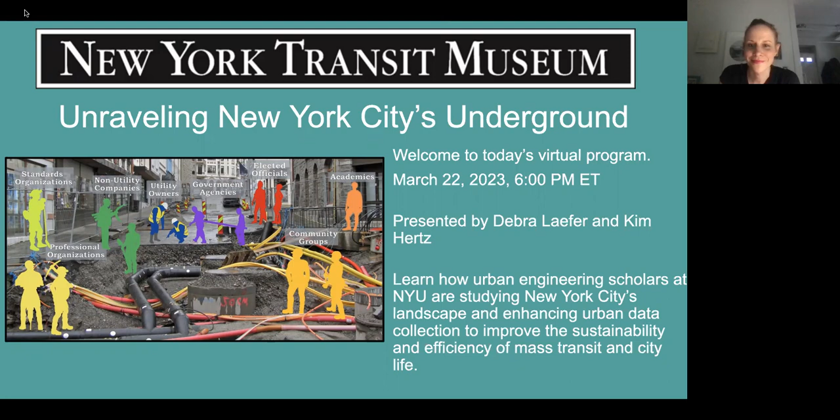Great, thank you so much. So in the spirit of a decommissioned facility, we are in a stairwell. So we thought that would be kind of a fun place to be. We lost our classroom tonight, so, but we're here and we're delighted to be here.

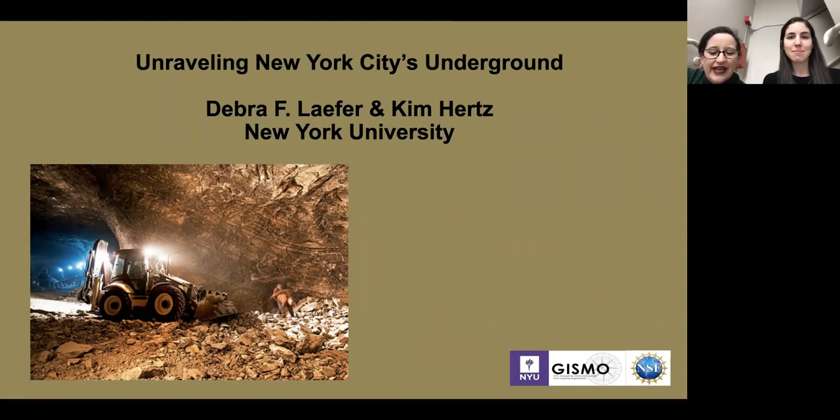It's so great to be able to talk to people who love the things we do, the things that are underground, the subway. I hope we can provide an expanded perspective for you today on what's going on down there. So the main topics we're going to chat about are infrastructure management limitations, abandoned infrastructure, and new tech.

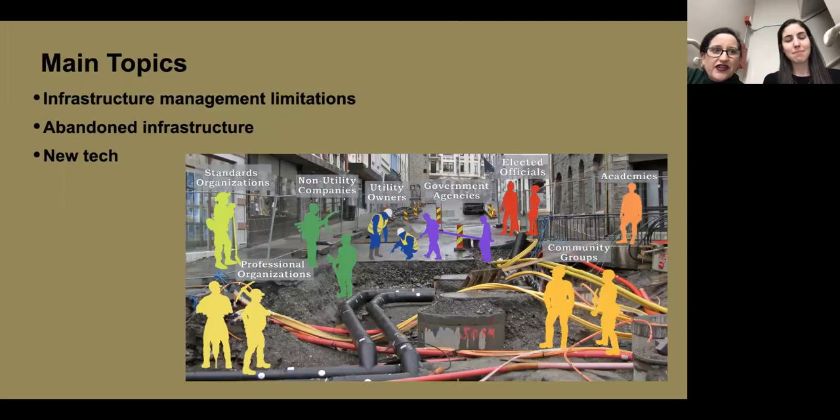Many of you have heard the term smart city. Certainly last year, it probably came across your ears. A decade ago, you would have heard it too, and even a decade before that, and a decade before that. This term was first brought in 1992. So are our cities today smarter than they were in 1992?

Certainly there are aspects of them. We know when the train's going to come. We know when the buses are going to come. Your councilman may be able to see on a live dashboard which streets in the neighborhood have been plowed for snow. But our cities still are not that smart. We still suffer from a lot of challenges.

So why is this? Why are our cities not smart? Today, the idea behind the smart city was to create what they call a digital twin, which was to put together technology of monitoring the city and being able to adapt accordingly. Today we've got robust, cheap, small wireless sensors, edge computing, which is where you're doing the computation at the sensor and you're not sending all the data over the web. Everybody knows about the cloud. And then these things called machine learning, deep learning, new ways to look at data, find patterns in it. And we have very dense remote sensing.

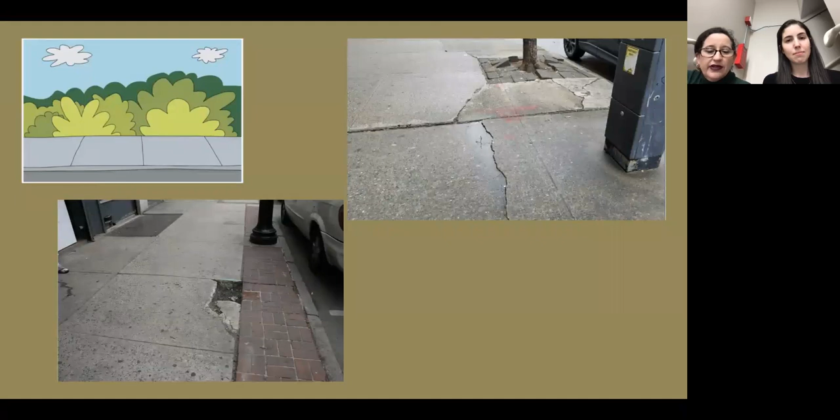When you talk about lacking domain expertise, if I were to ask you to draw a sidewalk, you might draw something like this, fairly straight, fairly same in dimension, quite flat. And the question then becomes, is this realistic? Well, if you go outside, you know it's not. Our sidewalks are much more complicated places. They're not beautiful like this picture. They're filled with all sorts of different materials, different conditions. Well, why would this be important?

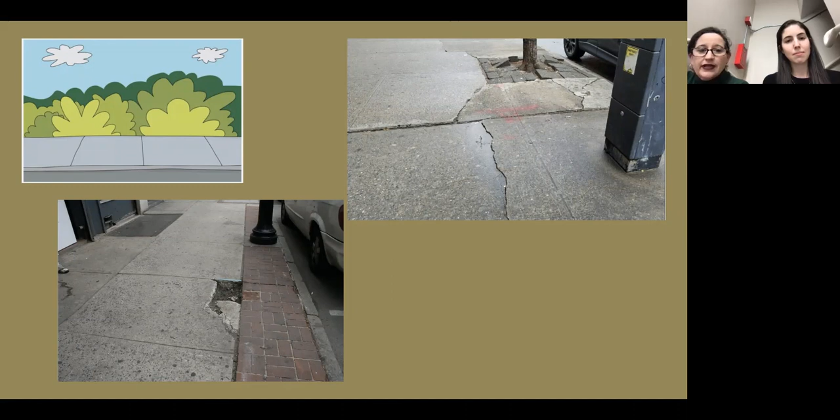If I put a little robot out to clean the street, and I told it that the sidewalk looked like the thing in the top left, we would probably have a very unhappy robot. The same thing applies to digital twins. If you create a system that is too perfect and too idealized, and doesn't really reflect the complexity of our urban places, this is what we get—things that are not fully functional.

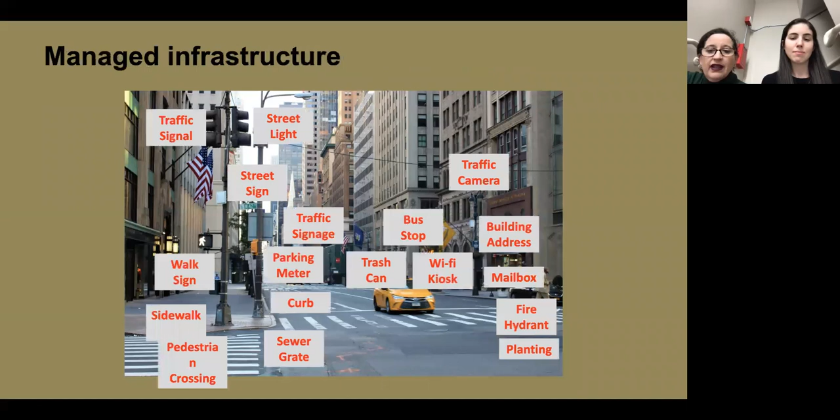Above ground, these problems are not so difficult. We have examples of lots of things that are monitored or could easily be monitored: traffic signage, parking meters, walk signs, all sorts of things. These provide a lot of what cities do in terms of public transportation, flood control, and trash.

Collection and fire response. When we get to the underground, it's not so complete—we really don't know what's there. Many people might think, like a body, that everything is in the right place, that there's a certain set of locations and organization to it.

We worked on this project with a wonderful artist named Emily Clark, and she came up with a concept to help people understand that cities are not like bodies. You may think the subway is a circulatory system, and therefore we know where all the pieces are, like knowing where the kidney and the liver are. But the underground is not so simple.

I'm going to share a short video that our artist Emily Clark made for us as part of the outreach for this project.

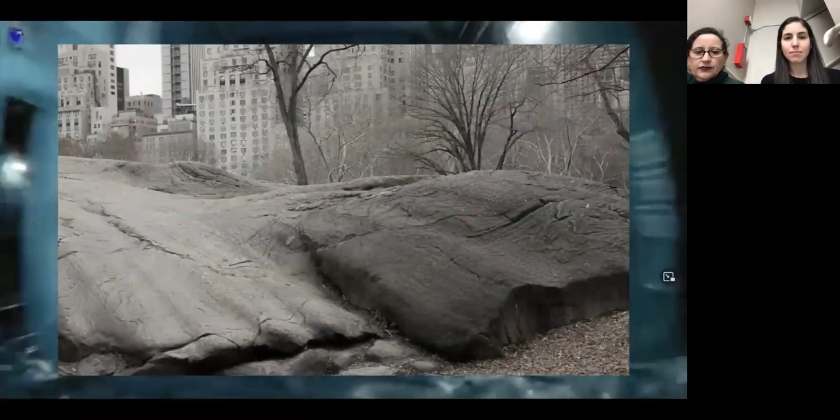A little over 20,000 years ago, the huge Laurentide ice sheet reached Brooklyn and began to form its geology. Then, as the southern end of the glacier began to melt a few thousand years later, it left boulders, rock mounds, small lakes, ponds, streams, and marshes. These still existing waterways can fill up during extreme weather and penetrate the subway's tunnels and stations.

On an average day, the subway pumps 13 million gallons of water into the city's sewage system. But when there's an excess of rain, the storm sewers back up. If climate change continues to fuel sea level rise and extreme weather, New York City's subway system will be increasingly vulnerable. During Hurricane Sandy, 46 miles of track were underwater.

Begun in 1904, New York's subway has grown with the city's population and now includes 22 lines, 472 stations, and 665 miles of tracks for trains that, before COVID, carried about 5 million passengers a day. This subway station goes back to 1915.

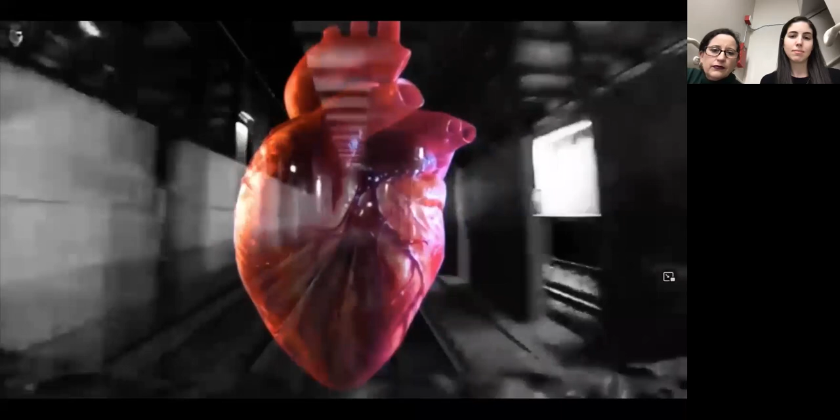Imagine New York City as a massive human body. The subways would be like our circulatory system, its arteries and veins allowing its blood, our population, to move throughout. Like the body, the subway depends upon many parts—trains, tunnels, and bridges—all embedded in the urban infrastructure of drainage, sewage, and electrical power sources.

Beyond all this, there is the natural world of rain and snow, of heat waves and cold fronts, which also impact the system. We may think of the subway as independent, but we can never extract it from the streets above it, the building foundations next to it, the utility manholes and pipes that run through it, and the sewage and drinking water systems that interpenetrate it.

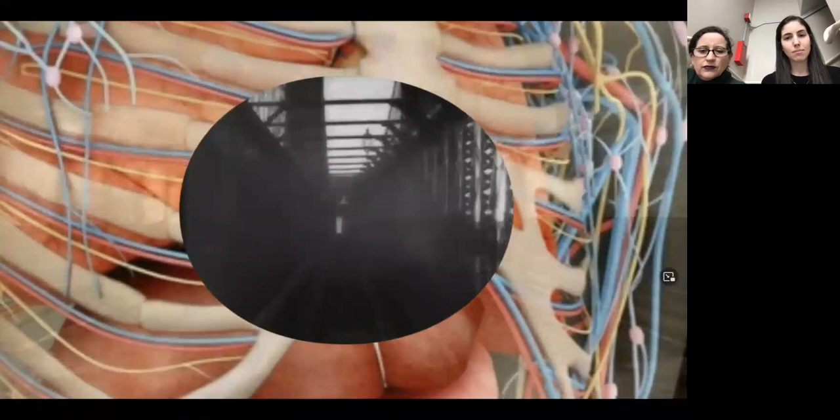Possible train routes were first determined by man-made underground infrastructure, but they were also planned in relation to geology, springs, and subterranean waterways. The subway's tunnels cannot help but overlap with the pathways of underground water, especially during storms. If the city is an organism in which the subway lives, the complexity of this organism itself already presents challenges. But the larger problem now is that this organism must also remain in harmony with the increasingly unpredictable environment around it.

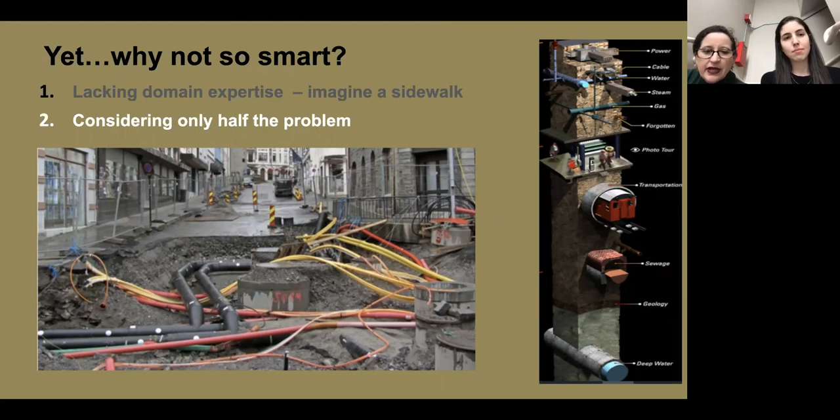I think it really gives us a wonderful quick snapshot of our city and the things that lie beneath it. When we do an excavation, unfortunately what we see is not a nice segregated set of services like you might see on the right, but you get this spaghetti problem, and everything kind of gets buried into these common trenches.

This becomes problematic particularly when we overlay all of this with the forgotten functions of the city. In many parts of New York, when you walk down the street, there are things happening beneath you that you might not be aware of: hollow sidewalks, basement access routes, coal vaults, things that maybe have outlived their service life but are still there. The sad truth is, once something goes in the ground, we rarely take it out.

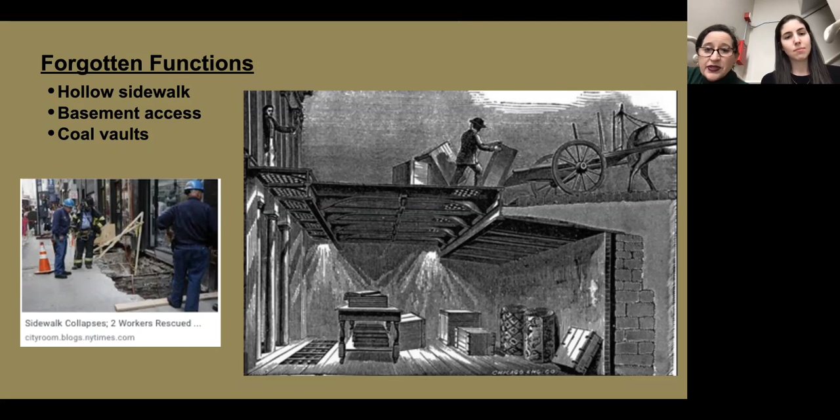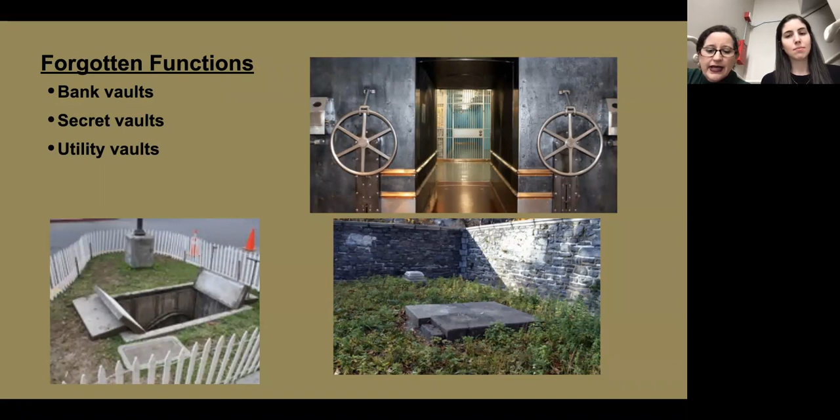Across New York City, there are bank vaults, utility vaults, all sorts of secret vaults, things that you might accidentally stumble upon, particularly if you were trying to do construction.

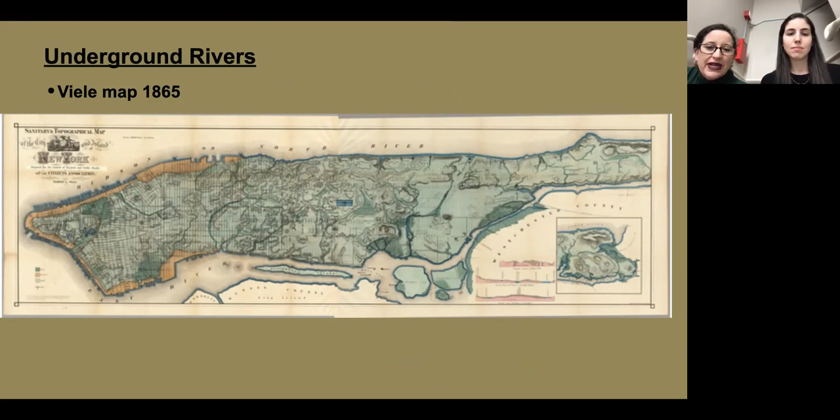There are also the underground rivers. If you're fortunate enough to be in Manhattan on a quiet Sunday morning over at 6th Avenue and Minetta Lane, you will hear the river run underneath your feet.

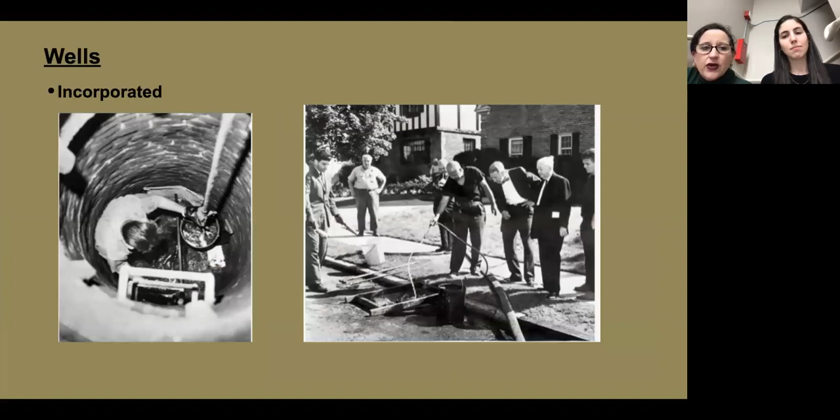One of the things I think we have little appreciation of is how our infrastructure and services have changed over the years. Traditionally, people got their water near their house—they pumped it, they had wells. What happened to all these wells? Some of them, like this one shown in Queens, was incorporated into the city's water system, but many were not.

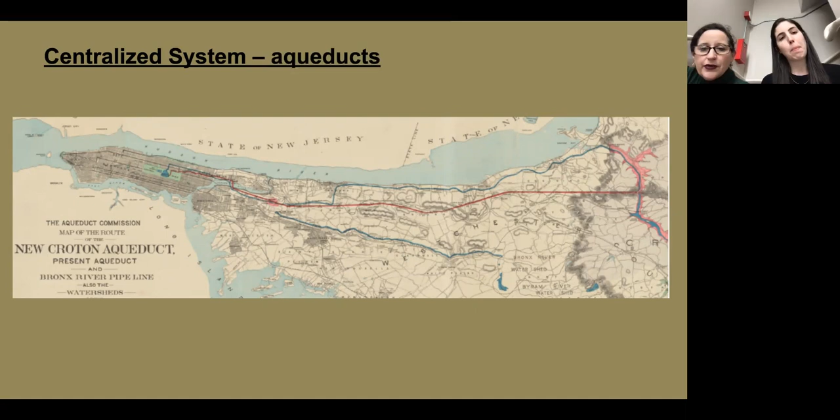Today we have the Croton Aqueduct. This was brought in quite early into New York City. These are major tunnels that run beneath our feet, and sit surprisingly close to many of our subway lines.

What about sewage? Obviously, initially people just had privies in their backyard. You might be surprised to see this map from 1902 that shows all of the sewer lines already laid in Brooklyn. So much of our infrastructure is quite old.

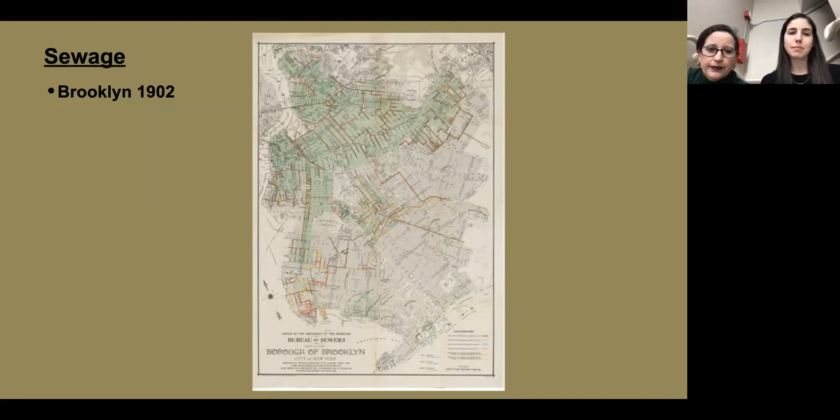Gas, electricity, and steam were brought into New York City in 1823. This is an ad from 1850 showing that you could come to dance halls, bowling alleys, all sorts of things, and there would be gas lighting. We often think of these modern conveniences as something that started happening in the 1900s, but much of this was already deeply in play here in New York City a good half a century before.

Our steam lines are something quite unique to New York City—100,000 buildings on steam, over 105 miles of pipe. Here's an early map of the steam lines, and they still cause us problems today.

Interestingly, they cause us problems not only when they explode, but because they're often sitting next to other utilities. For instance, if telecommunication lines sit too close to these steam lines, it tends to degrade the copper. So not only are we at risk of losing our steam, but losing our telephone service and fiber optic as well. Understanding the proximity of these utilities to each other is quite important.

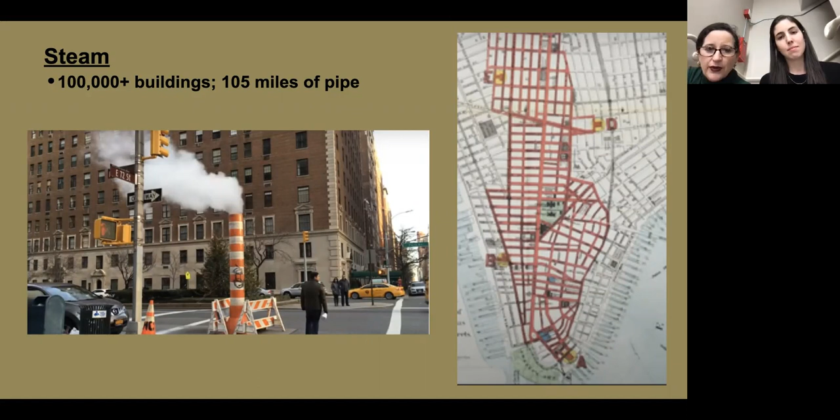You might not know that one in 5 of the major electricity plants today dates all the way back to the time of Thomas Edison. By 1886 in the United States, New York City already had 15,000 electric lamps.

There are also completely decommissioned utilities, things like the pneumatic tubes, which you see running not only from the bottom of Manhattan to beyond the top of Central Park, but all the way over to Brooklyn as well—7 million letters a day. And that piping all still exists underground here.

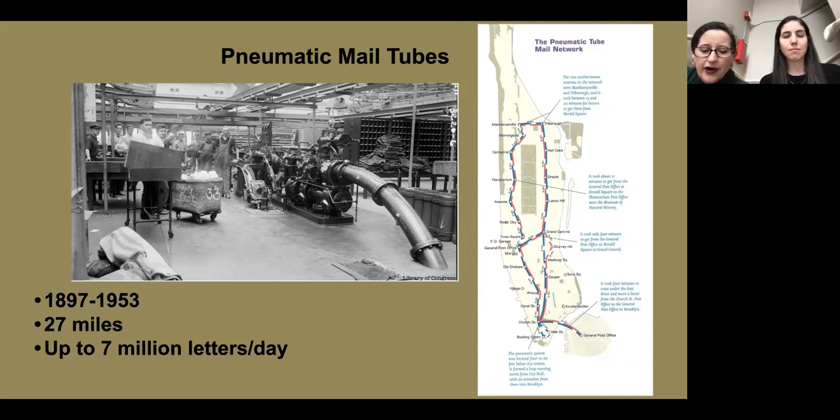What about our fire and call boxes? These are familiar sights around the city. Originally, there were 15,000 of them, dating far before we had cell phones. Today, there's still over 4,400 in operation. Unfortunately, they represent less than 3% of the emergency calls, but 88% of the false reports.

We think about utilities as something that are fairly static, water, sewage. But here on the left we saw pay telephones. Almost a year ago, New York decommissioned their last pay telephones. So what happened to these telephones? Well, obviously on top they were removed, but on bottom all of that wiring remained.

In many places they were repurposed into the LinkNYC system, but not all. So you'll see on the left where all the pay telephones were, and on the right where all the LinkNYC is. There's not a one-to-one correspondence, and many neighborhoods don't have that many. This is problematic because now these are often paved over and lost to local knowledge, that the communities they reside in, when talking to LinkNYC and requesting service, the response back is, well, we don't know exactly where these payphones were.

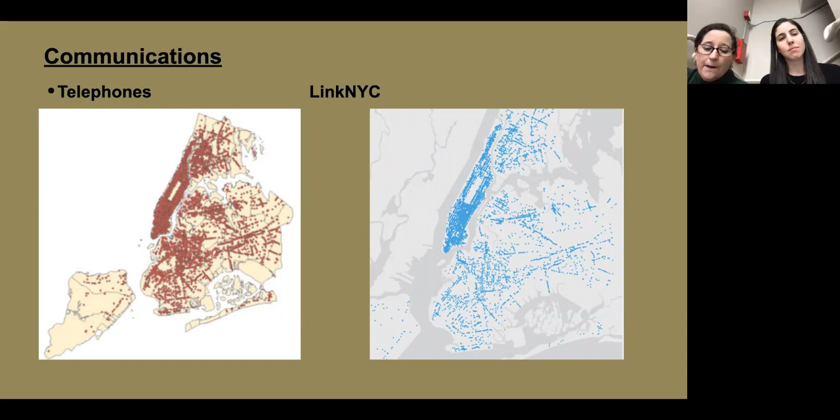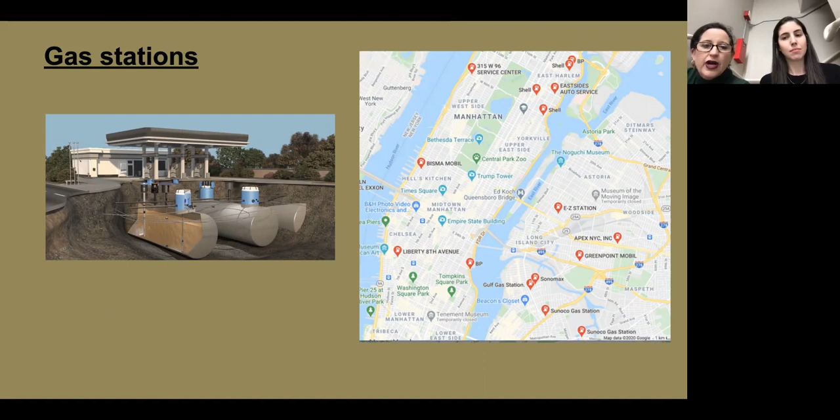We think of this again as something that happened in the past. But what about gas stations? There used to be quite a few. Even in my living in New York City the last 10 years, we have lost one of the few remaining gas stations below Central Park, down on Houston Street. The top remnants of this thing is gone, but below there are always these utility tanks and lines. Not only do they pose a challenge when we go to renew our city and put in new infrastructure, but they also cause an environmental hazard.

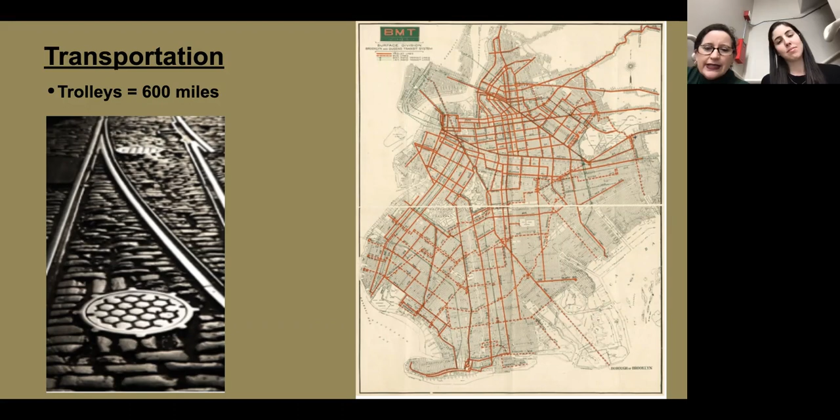I know everyone on the call is very interested in transportation. So here's a wonderful old map of Brooklyn, our trolley map here, 600 miles of trolley track. Where is it? The last trolley ran in New York in, I think, 1954 or 58. But that track mostly is still in the ground, generally paved over. And even if the track is gone, the ballasts, or the ties you're seeing here underneath, are still in the streets.

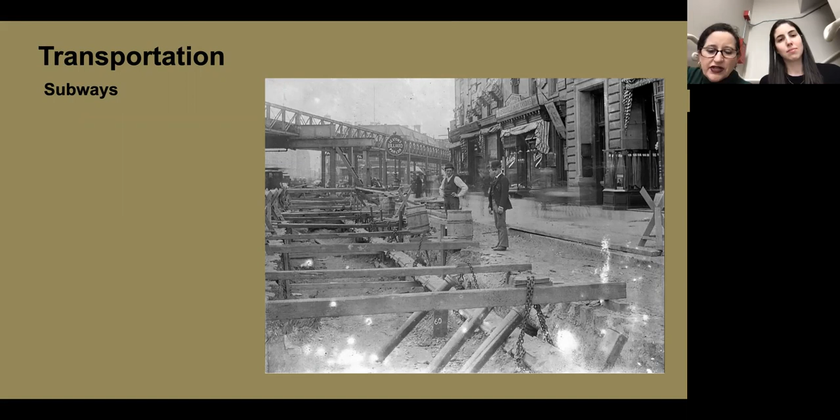Similarly, on the left-hand side you see an elevated train line, and on the right portion you see construction happening for the subway. When the subway was finished and the Ls were all taken down, only the above ground parts were decommissioned. What happened to all of the foundations that supported those trains? We also know that many subway stations themselves are actually abandoned. There's at least 9 that New York City has stopped using, including the one for our wonderful transit museum. And an equal number of active stations have unused platforms.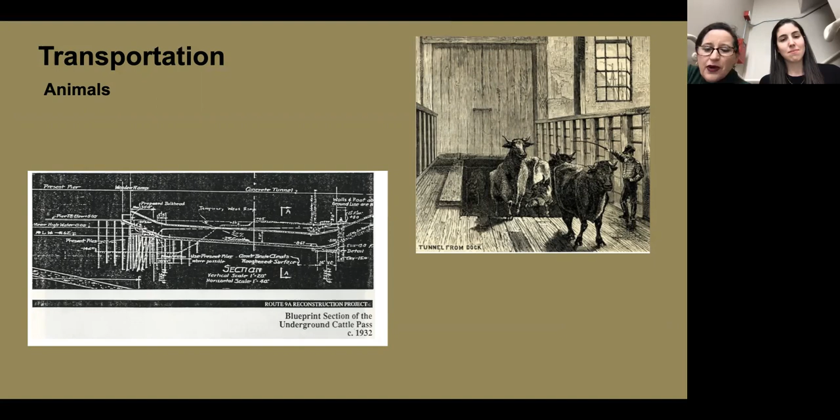So there's lots of surprising things beneath our feet. I think the key takeaway is that when technologies get abandoned and forgotten, it's very easy to quickly lose track of the remnants that they leave behind. So how do we start dealing with this, and why is it important?

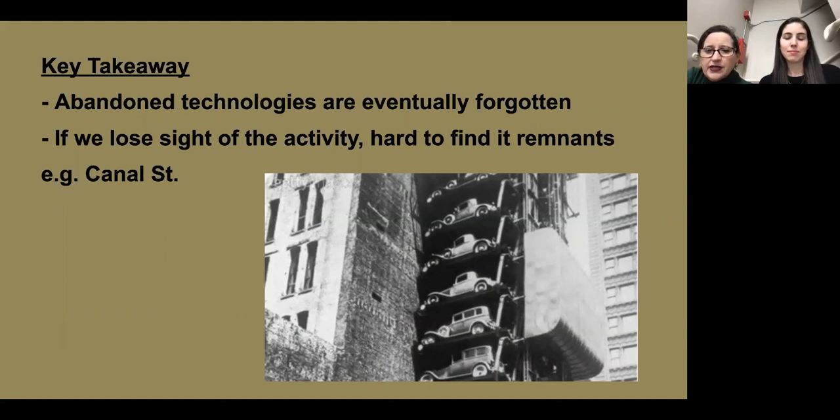If we look at where we are today in terms of modern utilities in New York City, many of them have finally moved to digitization. Some of them are even digitized to the New York City base map, but there's not a lot of sharing going on. So how do we start to overcome that?

Thank you. So last month we were lucky to have our collaborators from Ireland come join us to collect some data down in Sunset Park. As part of that, we also collected data at the Transit Museum, as you can see on the video on the right. I'll just take a moment to explain what you're seeing.

This is a handheld laser scanning device called a GeoSLAM, and you can see the process of using it. You need to start it at one point on the ground, you can walk on your route, and you can scan everything around you, including lower areas. We used this machine that was brought by one of our colleagues from Ireland. It's an inexpensive device, about $25,000, and it's relatively easy to carry with you to walk in areas and create these 3D model scans.

And then we also had our other collaborator who brought his more stationary scanning device. So what you see now on your screen is actually a very high resolution scan of the Transit Museum.

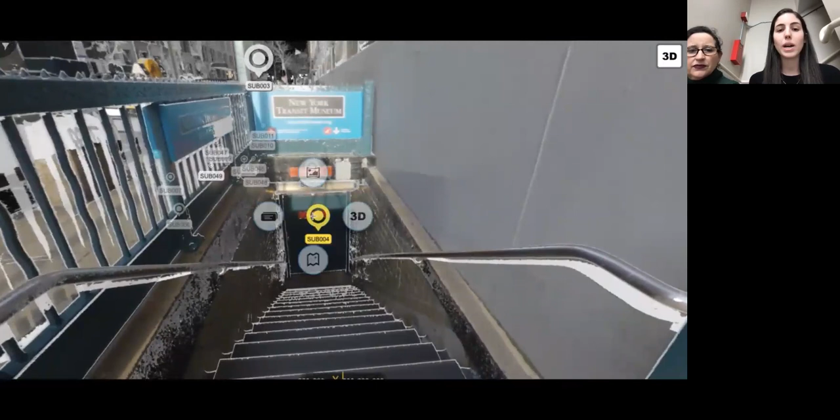It's important to know that this is not a video. This is me walking through different shots, and each time you see this white circle, for example the one you saw before on the ground, that is where the scanner was placed. So I just went through and clicked to go through each image on the screen. You can see we started from the ground level and then we went downstairs, and whoever's been there, it should look familiar to you, and whoever hasn't, this is a sneak peek.

And so here we went through all the turnstiles and everything all the way down. At this point, what we're showing is the image version. So what's important to note with laser scanning is that you collect the point cloud, the one you saw at the beginning when Professor Laefer presented, and then on top of it you can lay an image, and that's what gives it color.

And so this is us on the platform level, just scanning around, and in just a moment you will see the 3D version. So it's a bit more buggy, a bit harder for my computer to load, but I just chose a place on the ground and zoomed in, and in a moment you will see the different points as part of the point cloud.

So yes, again, these are all these millions and millions of points that connect together to create this 3D model that really allows us to move through the space, even from the comfort of our home, and see the details that we would see if we were there.

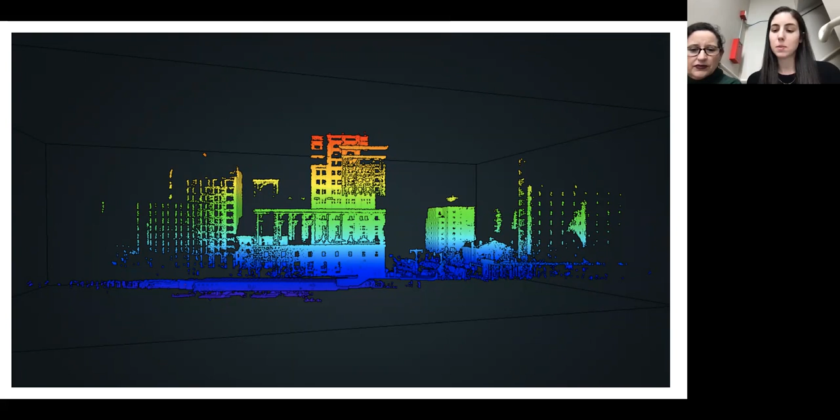So what can we really do with this? Why would we want to understand what lies beneath our feet? Well, first, to get an appreciation of how much space, how much volume is being taken up. When we look at this, what might appear as a cut-through, but is actually just a look at the 3D model, you see from the left side of the screen all the way to the right, this is the publicly accessible areas of the Transit Museum. That entirety along the bottom is actually the train station platform. And you can see in the top right, the connection with those stairs that Kim walked you down to the street level.

Well, what does this mean? And why does having an understanding of this volumetric occupation of the subsurface play a part in our modern lives? Well, one, we could think about how important it is if we're going to start reusing subsurface spaces for different activities. We want to put in better and new utilities, maybe another subway line. Well, if something's already there, it's going to be very difficult and expensive.

But there are other applications as well. Our partners in Ireland on that project have been looking at how to take information like this and come up with volumetric estimates of where water might go during a flooding event. So we see here on the left, a picture of Dublin, the end of a simulation for flooding. On the left-hand side are the estimated areas and depth of floodwaters without consideration of basement spaces. On the right-hand side, it's the same analysis, but using a volumetric sink at each location where we were able to establish a basement.

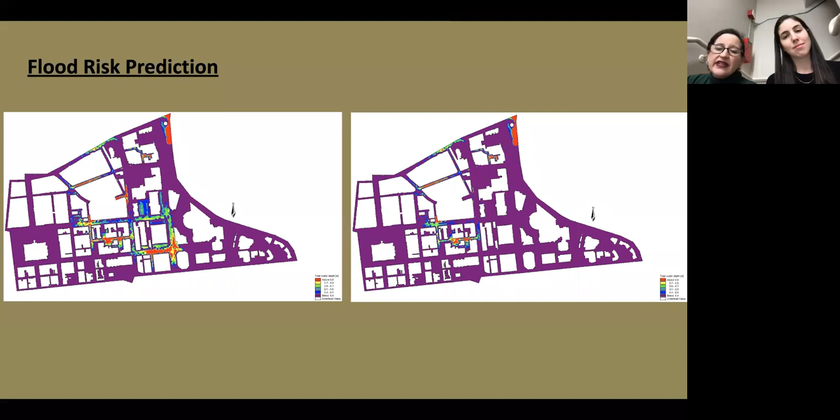It's also important in terms of risk communication. So here we've taken that same technology, that colorized laser scan, and now we've coupled it with another technology where we've put this with something called a flood filling scenario, and we're able to do an animation to actually show the flood waters of this area. So we can go to somebody's work, their home, their school, do a scan of the local environment, pair it with the predictions for flood from different hurricanes, and show people locally how that flood water is going to look.

I can tell you that the work we've done so far shows that 100% of people believe that seeing things like this is much more effective in educating them than showing a National Weather Service map and just telling them through text to evacuate. When you see your car halfway filled with water, you start to get concerned.

And we're hoping that by showing people things like this, we can motivate people to make better flood preparedness, maybe talk to their landlords about putting in sump pumps, and to also convey to people some of the importance with this.

What's interesting here is that one of our partners, the Newtown Creek Alliance, was helping us with this because they do a lot of work on flood risk communication and what it means to live close to waterways. And they said that they have a real problem that people think floodwaters are clean, and they go out and play in them, and they're often filled with sewage because that's what's happening as your sewers are backing up.

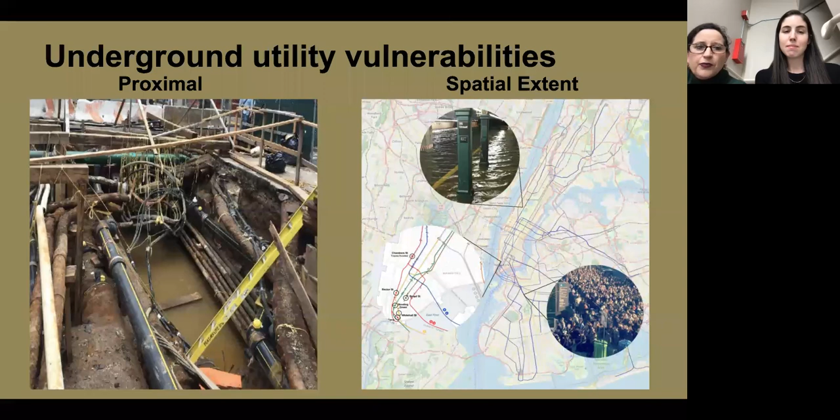So I thought that the question of where does the electricity come from was an interesting one, because it highlights for us that underground utilities pose two sets of vulnerabilities. The one on the left, I think we're all fairly aware of, where what I call proximal, where you have things that are buried usually in the same ditch, in direct burial, and they're next to each other. So if there's a compromise on one, there's an explosion or there's a leak or something, it may very well compromise all of the utilities that are in this area.

The one I think that we think less about in terms of vulnerabilities is the spatial extent, that these systems are connected.

If we think about the subway, when one subway station floods, it tends to flood much of the rest of the line. So you may have a low-lying area in one place, but that water travels. This analogy is the same for all of our other utilities. We only have so many electrical substations, so many places where sewage is processed, as well as energy produced. So when we think about energy coming into the city, sewage going out of the city, all of these are systems. Often things that happen in one part of that system can have terrible effects on other parts.

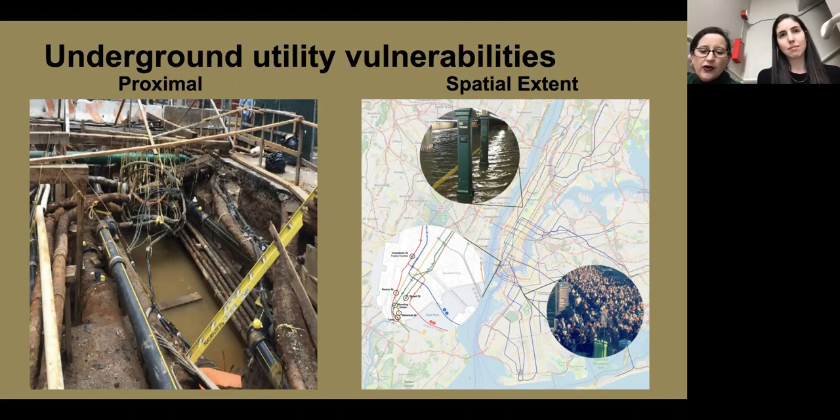Probably the most stark example of the criticality of having an appreciation of what is underground happened right after 9/11. Many people understand and know that New York City's Office of Emergency Management's GIS center, where they did all the mapping, was actually destroyed during that attack. It was in the basement of one of the buildings. People from all across New York and beyond came together in the days and weeks afterwards, trying to pull together as many maps and as much knowledge as various people had in their back pockets, in their mind, in books and maps, to bring it together and create maps for all the first responders and the people who were trying to clear the debris.

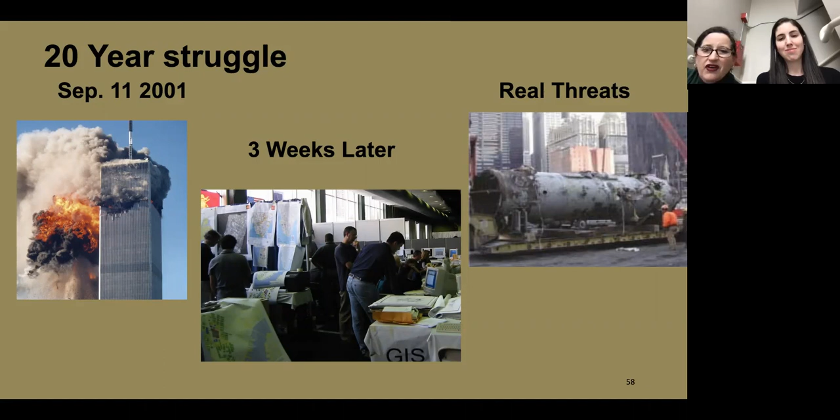So I will leave you with that thought. I want to emphasize that this has been really a 20-year struggle, that lots of people have been involved with really trying to move that needle. It's been a hard road because there are dozens of data owners and some of them don't have complete data. Some of it's not even digitized. There's obviously some security and privacy concerns. But at the bottom of it has really mostly been lack of money and lack of integrated leadership.

So we're delighted that we've been able to partner with Mayor Adams on this project. Our goal was to bring all these organizations together, get them to sit down and talk to each other, some of them for the very first time, about the criticality of having not only full digitization of their data, but immediate interoperability. We're not talking about everybody turning their data over to the mayor's office. We're talking about Con Ed keeping their data, Verizon keeping their data, National Grid keeping their data, so they're keeping it up to date, but in a data format that can be readily exchanged and integrated, so that we're not spending days or weeks after an emergency, but only required to wait minutes or maybe a few hours.